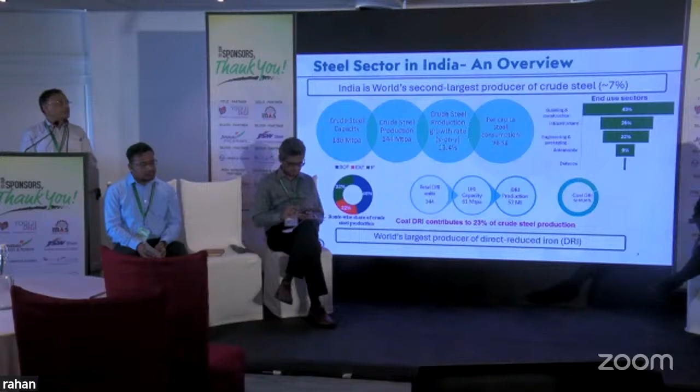Now, coming specifically on the steel sector, this slide gives... I can't see it very well, so I have to look at the printout. What is the growth rate?

Another important factor for the steel industry is production, about 150 million tons presently. This statistic, 144 million tons, was last year, 23-24, and it has been growing at double digits. The Ministry of Steel is also very proud to say that the steel industry has been growing at double digits, unlike other sectors of the economy, which are growing at 6-7%. Last year's growth rate was almost 13%. So it is very high, the growth rate is extremely high.

One of the reasons for the growth rate is the boom in the construction sector, and this is a hub. West Bengal is a hub of steel, TOR steel. So many big steel companies are here, and they are making mainly for the construction and infrastructure sectors. These are the main growth drivers for steel.

What is also important - all of you are from the steel sector, so I need not mention that India is one of the largest producers of DRI, almost 350 plants. And that also coal-based DRI, which is the biggest bottleneck for decarbonization. That is well understood now. 80% of DRI production in India is coal-based, using the horizontal rotary kiln.

Unlike in the West, Europe, USA, everybody is on natural gas-based DRI. Mostly all are natural gas. Coal-based DRI is only used probably in India or South Africa or some other countries - very few countries in the world use this kind of technology. Hence it is a big challenge for decarbonization.

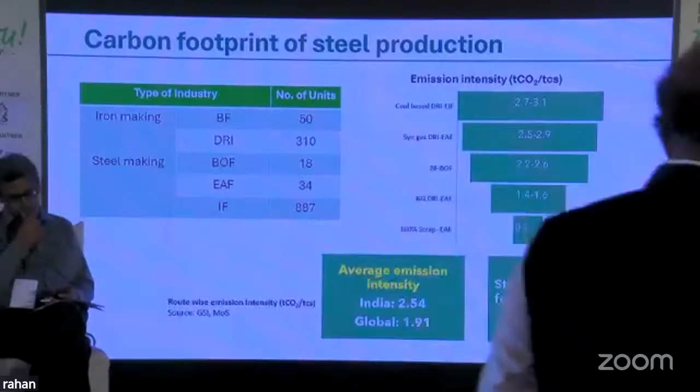As I showed you in one of my previous slides also, the per capita consumption of steel in India is still very low, 98 kgs, whereas in developed countries it is 300 to 400 kgs per person per annum. So the growth drivers are in India, and everybody is wanting to focus on India. Now I don't know how much it is translating into the ground, but that is a challenge, and I'll talk about some of the challenges later on.

These are the various decarbonization initiatives taken by the large corporate sector. It is heartening to know that most of them, I'm not going into detail here for lack of time, but everybody, the large steel players like JSW, Tata Steel, Jindal Steel Power, everybody is talking about decarbonization. All are focusing on it because they see a future for that, and they have announced a more ambitious target than the country's emission target of 2070. It is very heartening to note that, obviously keeping in mind that if you have to be a player in the international market, you have to do that. Otherwise, there will be some kind of carrot or stick approach which will come. It is already under planning, but it can come anytime. After 2030, I would think we have got a good lead time of 5 years before anything like carbon tax and things like that are introduced.

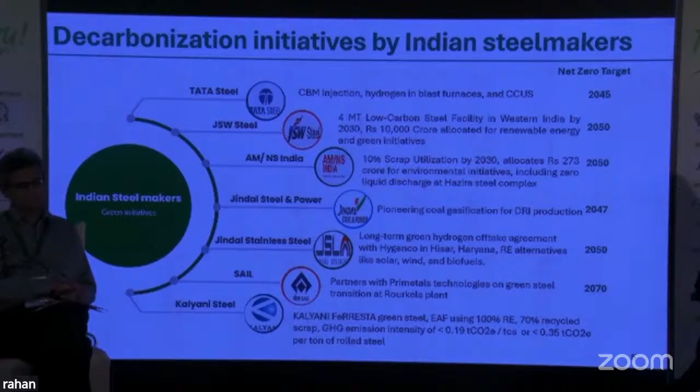Here also one of the slides tells about Kalyani Steel. I'm sure all of you are aware of this Kalyani FeRRESTA initiative, where they have used scrap, melting scrap in an arc furnace using renewable energy, and they have achieved very low emission, that is green steel, of intensity 0.2 tons of CO2 per ton of crude steel. So this is an initiative which Kalyani Steel has already done.

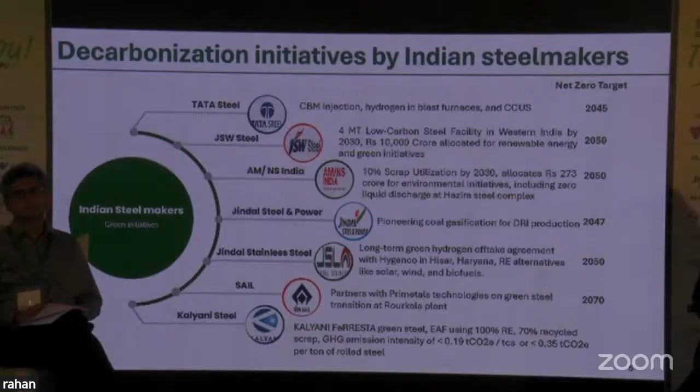Now, net zero roadmap. I will drop this, won't go into details. I don't know how much time I have already taken. Sambit, how much time is left? You have 5 minutes.

No problem, okay. Because this is the India initiative, government initiatives, and all of you are aware of this kind of national steel policy, vehicle scrappage policy, national green hydrogen mission, and so on and so forth. These are national level policies. Government has taken a lot of proactive measures, PLI scheme for steel, for example, for specialty steel. So things are moving, government has been thinking on that. In a way, it is quite positive. And we have also partnered with the Ministry.

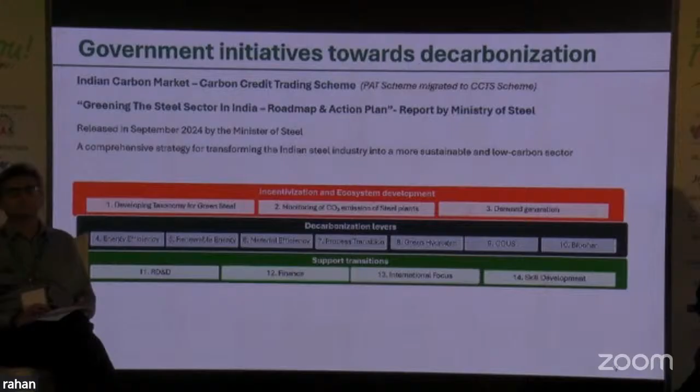TERI is a partner with Ministry of Steel in this initiative of greening of the steel sector in India. I'm sure you might have read this report or be aware of it, the roadmap and action plan. This was released by the Ministry of Steel last year in September in a function in Delhi. We have partnered with, and been a knowledge partner to, the Ministry of Steel, and TERI has actually supported 7 of the working groups. There are 14 working groups which were set up, and all the industry people were also involved. For example, right from developing the taxonomy for steel, CO2 emission monitoring of steel and how it can be done, demand creation for green steel, energy efficiency, renewable energy, material efficiency, circularity, and all those kinds of things, CCUS, biochar, R&D initiatives, financing, international focus, skill development and skilling. These were discussed over 2-3 months, or I think it went over 6 months of discussion, across several working groups. Then it was consolidated into a huge report, a voluminous report, maybe 300-400 pages, which has been released. It is downloadable, freely downloadable from the Ministry of Steel website.

Decarbonization of steel, which is our topic, we are running out of time, but let me mention these are analyses done by TERI, not a government analysis. We have analyzed the different ways of decarbonization if we have to reach net zero.

In material efficiency, reducing the material usage of steel in production design or construction, or replacing steel with alternative material, that can contribute about 10% savings of CO2. Electrification, new technologies under development like electrowinning, HIsarna and others, these electric technologies can reduce about 9-10%, and it is possible to do that.

So the biggest lever for decarbonization of steel, just to recall, is green hydrogen at number one, CCUS at number two, and then circularity or scrap usage. This can actually reduce almost 60% of emissions from the steel industry. These are the big levers.

Of course, there are challenges. It is easier said than done with hydrogen, because the technology is still under development. Green hydrogen DRI making is still under development - it is already developed but not fully commercialized, I would rather say. It is developed and demonstrated in Europe.

I can see I'm running out of time, but if we look at the roadmap, we have drawn a graph about the different levers, and the bottommost graph in blue is actually decarbonized. We are trying to reach net zero by 2070, and how the different levers - these 5 or 6 levers I talked of - stack up and contribute up to 2070. This is forecasting that steel production will rise 4 to 7 fold by 2070 at a steady rate, taken from population growth rate figures.

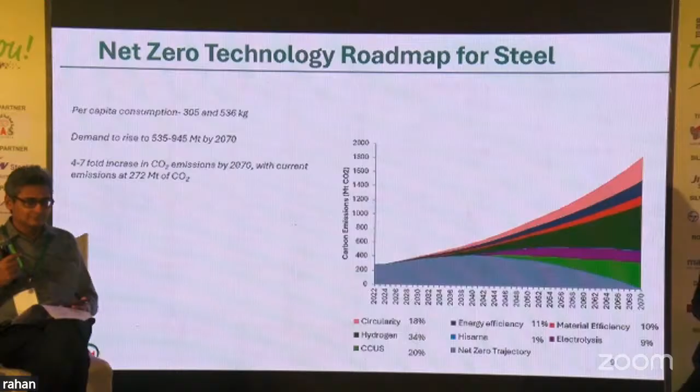So this is a modeling we have created - this is TERI's own model, not taken from other sources. We have developed this model ourselves, and our detailed figures are available with us, showing what can be done for each lever.

Of course, policy is a big challenge. For example, lack of common infrastructure for CCUS, common pipelines for hydrogen, and things like taxonomy for steel. So government support for CCUS and green hydrogen is a key lever in the policy space. If we look at financing, again the most important lever is cost of finance.

I'm sure all of you agree, unless it is economic to produce green steel, it can't be mobilized. So low cost capital, subsidy, low interest rates - things like that for de-risking investment in green steel. Anybody producing green steel at this point, the government needs to think of de-risking the investment, perhaps through a risk guarantee fund, and business models to promote use of scrap and circularity in the Indian system.

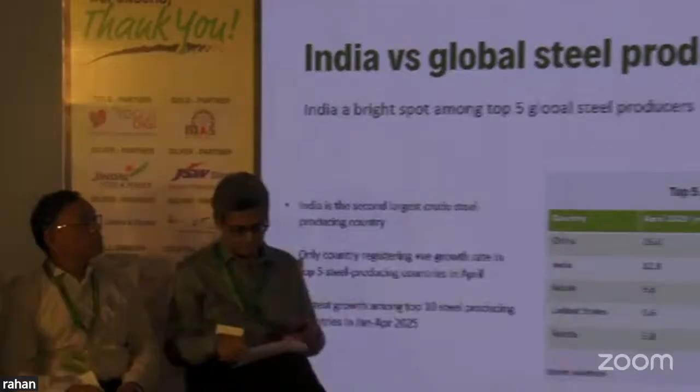I wanted to start off with a little bit of context setting, essentially to show the importance of India, not just for us here discussing the steel sector, but also on a global perspective. The reason being that it's the second largest crude steel producing country in the world. It's also the only country registering a positive growth rate among the top 5 steel producing countries.

What's been driving this change is very strong macro indicators and government initiatives. There's a huge push on infrastructure projects. There's a lot of demand from end-user sectors as well, like infrastructure, construction, manufacturing, automotive. So on a ground level, the fundamentals are pretty strong, even though currently there are some headwinds which I'll get into later. There have been some changes in fiscal year 25 and now 26 as well, mainly the domestic market being impacted by imports. However, with the onset of the safeguard duty, there's been lower imports so far, but currently there are still some challenges that India is trying to overcome at the moment.

Here I have included the current HRC, CRC plates, hot dip galvanized, and also pre-painted coated galvanized prices. As you can see, prices have been trending higher between January and April. The reason being there was a lot of rumors circulating about the safeguard duty, which caused prices to spike. And finally, with the imposition of the safeguard duty, that helped keep prices higher. However, since May of this year, there's been a bearish trend in HRC and other flat product prices because of seasonality.

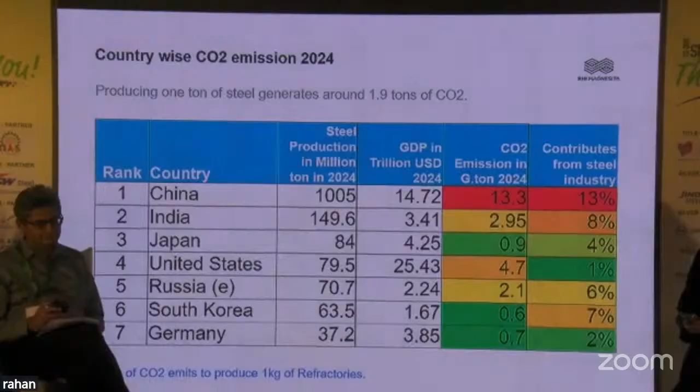I'll quickly go over the correlation between CO2 and economic growth. Today, India is the fifth largest economy in the world, but there is a correlation. In terms of CO2 emission, India is the third largest contributor of CO2 emission. You can see here, it's after China and US. But the major difference is that the US economy, being the largest economy in the world, is based on the service industry.

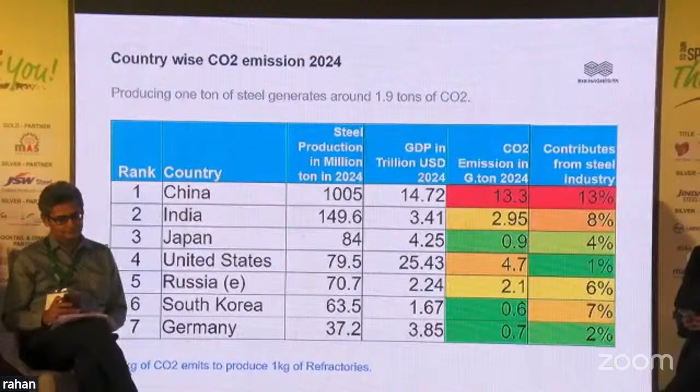If there are three components of the economy - agriculture, industry, and services - more or less 85% revenue comes from services for the US. But it's just the opposite in case of China. China is a manufacturing based economy, and followed by India, another largest manufacturing based industry in the world. Naturally, when any economy is based on manufacturing, there are obvious reasons to emit more CO2 in the atmosphere.

I've also put some data on steel production. As somebody mentioned in the morning, the steel industry produces 40% of the CO2 emissions among all put together. So here I've contributed the country's contribution vis-a-vis steel industry's contributions. You can see in the graph that there's a 13% contribution from the steel industry in China. US is the lowest - it means, as I mentioned, their economy is service based, not manufacturing based. Even in manufacturing, they are not strong enough in steel. They are into oil and gas, chemicals, and other industries that emit much lesser CO2 than the steel industry.

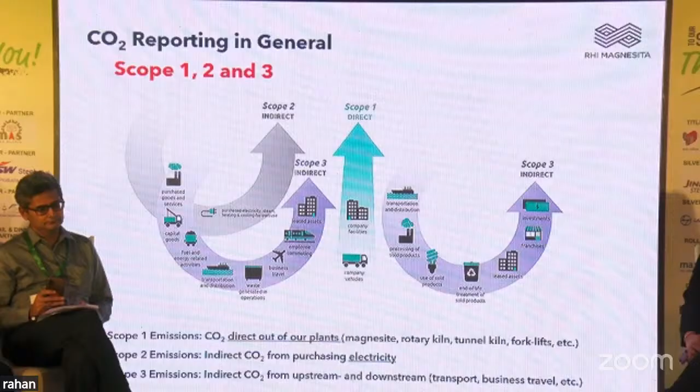Then after use, we dismantle that refractory. After dismantling, we again collect it in a particular way so that we can reuse that material in the process again, of course with proper treatment. That is all about the circular economy in the refractory industries.

In short, as I mentioned, about 2 kg of CO2 emits to produce 1 kg of refractory. Normally it's a direct correlation - if you use more and more recycled material in the recipe, your carbon emissions will get reduced almost in direct proportion. So for 2025, globally we have a target of 15% recycled material to be used in production. Last year we achieved 14.5%, so this is very pragmatic and very easy to achieve this target. You can say the reduction will also be 15% CO2 reduction taking place.

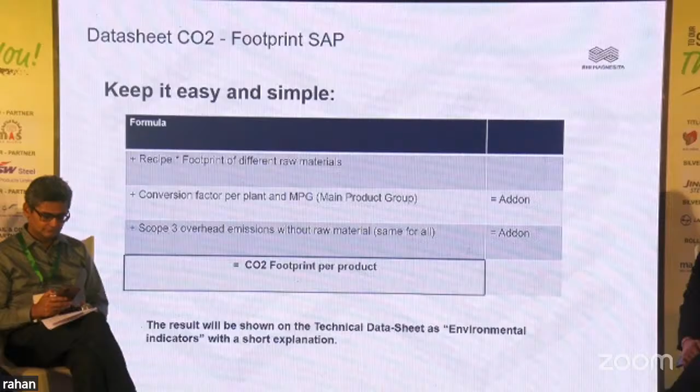From RHI Magnesita, we mention CO2 emissions, or carbon footprint, for each and every product we produce. For green steel producers who are concerned about CO2 emissions, we have various solutions. For a single product, we have 2-3 categories that give different levels of carbon footprint for the same product, because today, particularly in Europe and US, they have also started mentioning CO2 emissions in their products. So from RHI Magnesita, we took that initiative and already implemented it in 2023. Every product we produce, we mention its CO2 emission.

So, just an example, ANKERHARTH, that is the bottom hearth of the electric arc furnace. That's one of the strong brands of RHI since the last 50-60 years, the ANKERHARTH brand. We mention that 1.7 kg of CO2 emits to produce 1 kg of ANKERHARTH material. So a steel maker, if he has some calculation or a target to achieve a certain CO2 emission target, he can control or select the product based on the carbon footprint.

CO2 emissions take place differently for different product lines. For example, for alumina systems, the CO2 emissions are much lesser because the impurity is much lesser in the alumina-based or alumina-silica based product. In the refractory industry, primarily there are 3 products: the basic, that is magnesite and dolomite; the non-basic, called alumina, that is the bauxite based material; and the acidic, very rarely used, only in a few cases for the coke oven battery, that is silica refractory. That does not emit too much CO2.

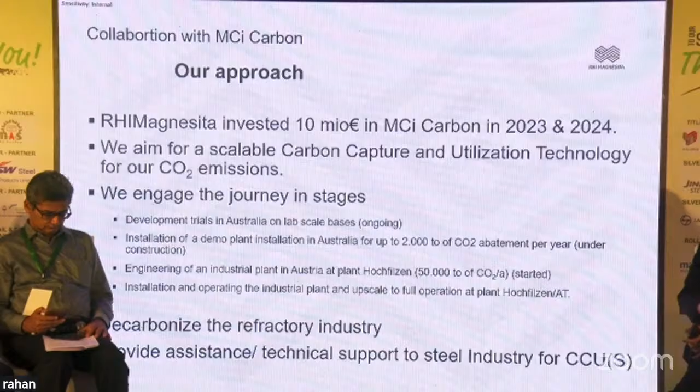For alumina systems, Gujarat is the region where we maximum collect and process bauxite, which is also used in alumina systems of refractory, but we also import high volume of bauxite from China. So it is not a major concern for India at the moment, except using more and more recycle in the process.

Globally, what we do today is the conventional way. For India, at the moment it's directly proportional - if you put more amount of recycle in a controllable way in the recipe, you can save more CO2 and reduce lesser CO2 emission to the atmosphere.

Second, if we switch from basic systems to neutral systems like alumina silicate, that also reduces carbon emissions. Today JSW and Tata Steel - if you're from the steel processing background, you know there were recent changes in the last 2 years where magnesia carbon used to apply in the slag zones is now getting replaced by spinel bricks. Spinel is just alumina spinel, only 4-5% MgO in the system, because of the carbon pickup and other issues, and that gives much 20% better life than magnesia carbon. So that change has already taken place, which is an ongoing process.

Second, electrification - if you switch from oil or gas producer to electrification, CO2 emissions can be reduced. The last point is CCUS, carbon capture, utilization and storage, which isn't really being done yet from the refractory side in India, but globally RHI Magnesita started doing some activity on CCU, and we did a partnership with the Australian startup called MCi Carbon.

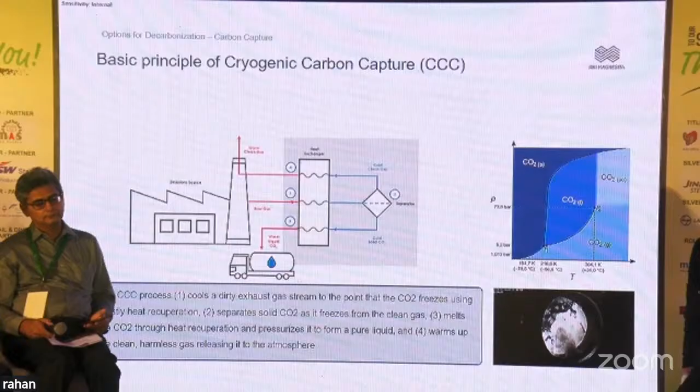Now the CO2 you collect in solid form, you process through a heat exchanger to convert it into liquid, and once it's liquid you can store it somewhere and use it in different applications like mineralization and food processing industry. I'm not going into details, I'm skipping this slide - I already mentioned the same thing.

Now, what about H2 at RHI Magnesita?

Honestly, at the moment we are not doing anything for H2. We are just focusing on CCU, carbon capture and utilization. Why not focus on H2? Because as of now, we do not even know how refractory will behave under a hydrogen atmosphere. If you use hydrogen as an alternate fuel for calcination or sintering, how the refractory behavior will change is still not known to us. Research is going on regarding how refractory will behave under hydrogen atmosphere, through burners or in the whole environment during application and processing, but it's not yet tested.

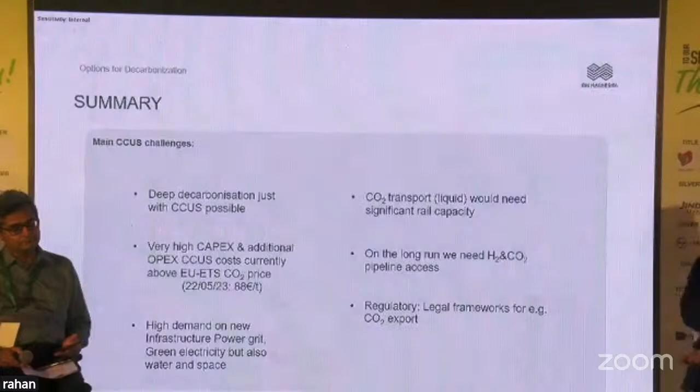But for CO2, we already invested 10 million euros with MCi Carbon, an Australian company, to set up a pilot plant for how to capture and utilize CO2. I'm not going into the challenges, but as you mentioned, in India there will be separate pipelines for CO2 and hydrogen gas. There will be massive capex investment, and storage or transportation of H2 and CO2 gas. So whatever the steel industry plans for 30 years after 2050, we are aligned, but from our side in India, we are not focusing on that much yet.

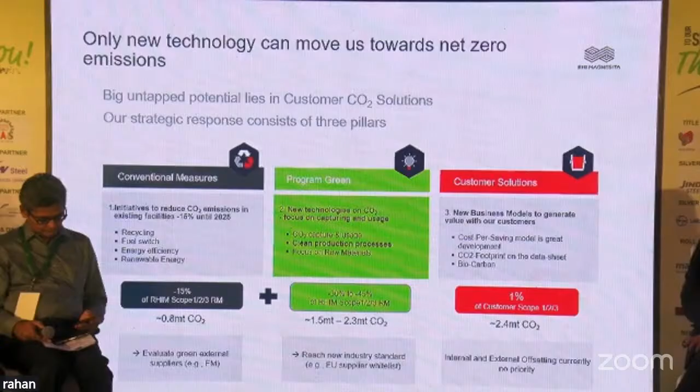There is no control because they give this job to a third party, and for economical reasons that third party goes to the open market. While collecting spent refractory this way, there is a high chance of mixing all those grades, because that is the takeaway. If, during dismantling, you keep the basic part separate and the alumina part separate, there is less chance of contamination — that we need to avoid.

That is why the steel industry has to make a partnership with the refractory producer, because they are concerned about quality. This is not something new for India — India has used recycled material for the last 30, 40 years, but that was for economic reasons, not ecological reasons. Today we started thinking about ecological reasons, because more recycled material gives less CO2 emission to the atmosphere, without compromising quality. That is why these two stakeholders have to align with each other, so there should not be any third party where chances of quality compromise mess things up.

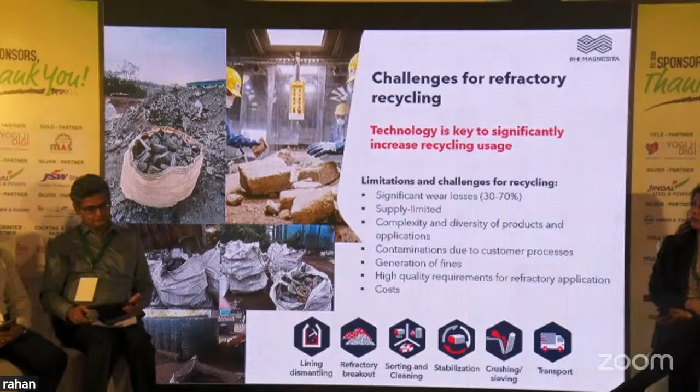So this is the situation. Thank you very much for your questions.

Thank you, Mr. Shatra. This is indeed a very in-depth analysis of sustainable refractory production. You talked about our limitation because raw materials are mostly imported from China, and how we have to change the type of refractory used from basic to neutral or acidic, like alumina and alumina silica. You also talked about how you changed from coal to oil and natural gas. But in the eastern sector of our country, natural gas availability is a question, and this needs to be carried out in tandem with the steel sector, ferroalloy industries, and refractory industries, because without their support and application, the steel industry cannot sustain itself. So this is a very important part of and challenge for our future.

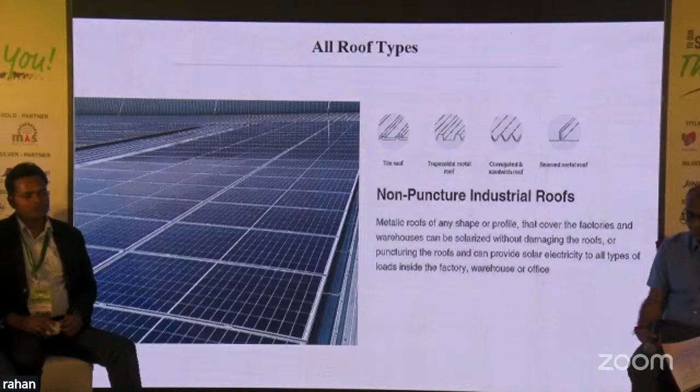So you can see the roof types that we cater to are trapezoidal, standing seam, and any other profile of roof, even the RCC roofs and the parking sheds. This non-puncture type installation helps you achieve uniform load distribution without any puncturing and without any long-term damage to the roof, so that your roof sheet life is also preserved along with the 25 years of performance and product warranty that we give with our solar hardware.

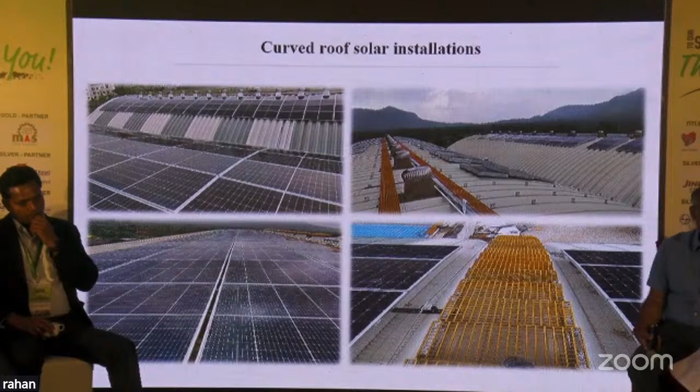Here are some other snapshots of our installation, like the one you see at D Decor Home Textiles near Mumbai, wherein the vertical wall mounted option was chosen because of scarcity in roof space. It's a total 3.7 megawatt industrial installation with 700 kilowatt on the vertical wall. And even on curved roofs, this is our installation at Varsha Foods in Andhra, who is a mango pulp maker. This is a curved roof installation that we have done.

And this video, you can just click on it. No, just click on this. Click on the slide.

This demonstrates the mechanical strength of the non-puncture type mounting frame on which the solar panel sits. As I said, this has a wind load stability of up to 200 kilometers per hour without any puncturing, riveting, or drilling.

So that you understand the care and the responsibility we take not to harm your factory building roof while you execute the rooftop solar project.

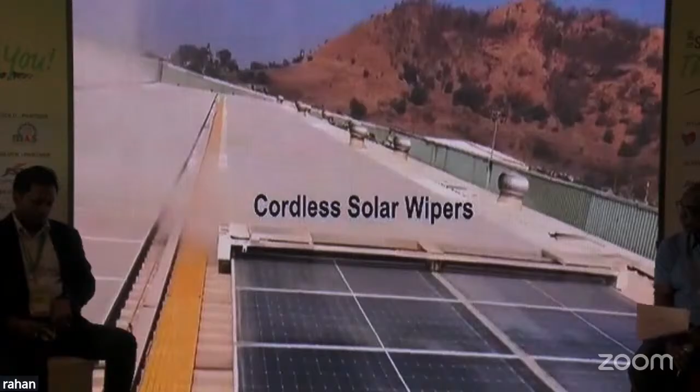So this is the rooftop solar installation. Could you play video number 3, please? This is another video where you will see the ground-mounted solar plant we have done in Madhya Pradesh, which is over a 2 megawatt plant. The robotic wiper is again doing the cleaning round to eliminate dust settling on the solar plant, which is a major recurring cost and pain area, a labor-intensive recurring cost to keep solar plants clean. This automation is manufactured in-house at our Indore factory, the cordless robotic wiper.

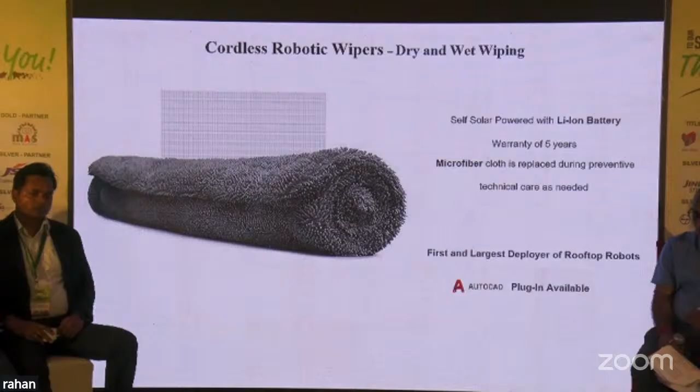Coming to the other aspects, the key differentiators we have over and above the other solar players: the 25 years of warranty on the complete hardware helps eliminate any recurring CapEx cost for replacement of inverters or accessories. The robotic cleaners help eliminate the recurring cost of labor. The 10 years of technical AMC, which we present along with our CapEx offer. And of course, the puncture-free technology with load on your roof less than 13 kg per square meter to take care of the health of your factory building in the long run.

So I will end my presentation with a video of our completely integrated solar technology. You can play video number 4, which highlights the solar technology.

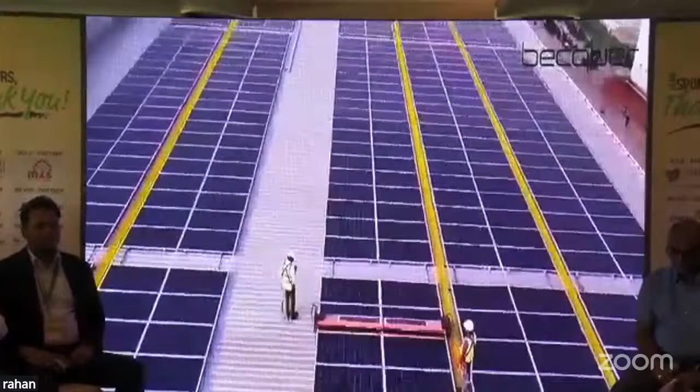This is one of our installations, and you can see the robotic cleaners integrated with the rooftop installations here, which move across your roof, cleaning the solar plant without you spending a penny on manual cleaning on a day-to-day basis.

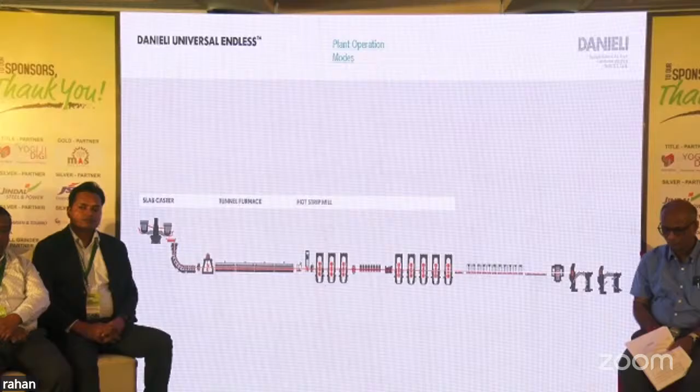This is a typical layout of Danieli QSP DUE - we call it DUE Danieli Universal Endless. As you can see here, we're talking of the caster till the down coiler: the slab caster followed by the tunnel furnace. In front of the tunnel furnace is a pendulum shear, the hot strip mills, the laminar cooling, and the down coiler. What makes us different is that our mills are split, the rougher and the finisher. What is the advantage of it? I'll try to speak about that in the next slides.

As you can also see here, we mentioned CTC, that is coil to coil, which is like a batch mode, one slab into one coil. In between there's a semi-endless, and then the endless. Endless is a concept known to most people here - in endless mode, there's no particular division of a slab, it's cast continuously and the coils are made. But how is the difference between having 3 modes? Imagine a car - you have eco mode, a powerful mode, or a cruise mode. Based on the road you drive, you can change the mode to get the best suitable output of your car. It's similar - coil to coil has certain advantages, as do the semi-endless and endless modes.

Let me give you a point about semi-endless - when do you prefer it? For instance, you'd like to roll silicon steel or ultra low carbon steel, which has the limitation of slow casting speed, but at the same time needs a higher finishing mill exit temperature - contradicting requirements. So you have a slow casting speed from the caster, but need a higher temperature at the FM exit. That's where induction heaters in between help you, and so semi-endless gives you a better feature. Now I'll explain to you what CTC, semi-endless, and endless are.

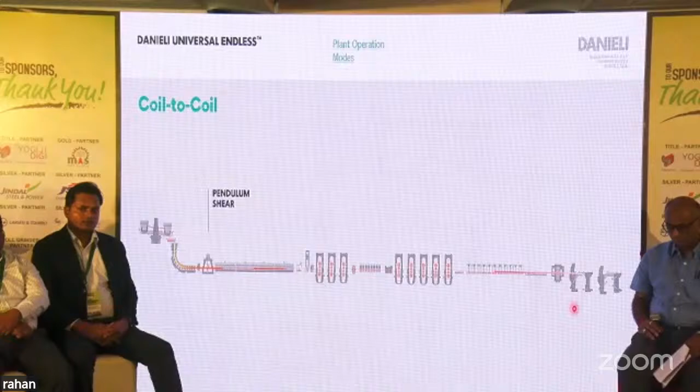So this is a coil to coil in which you can see that something is traveling here, and then one slab becomes one coil. The partition is done by the pendulum shear. This is something very typical of what we have seen in thin slab casting and rolling in some of the plants in India.

Now comes the difference, the second one, the semi-endless. In case of semi-endless, one slab is equal to the complete length of the tunnel furnace. Now the partition takes place, and this longer slab can be further made into baby coils of say 5 or 6. The division takes place at a high speed shear.

The semi-endless has the benefits of both coil to coil and endless. As I mentioned, in case you want to roll silicon steel NGO, the semi-endless will give you all the best features of it. Now this is the endless mode.

There are technologies available in the market which are purely coil to coil or purely endless, while what we are offering is a plant which can work on all three modes, and you can choose between coil to coil, semi-endless and endless. Endless is very important when you go for ultra thin gauges, talking 0.8 mm or 1 mm of low carbon, with tight geometrical tolerances. While you're talking of silicon steel or ultra low carbon exposed grades, you switch to semi-endless. And when you're talking of API, you go to CTC, coil to coil mode.

Now, what is the challenge of endless mode? The challenge is that it is less energy efficient, and it takes a lot of energy in terms of induction heaters, because of the slow casting speed driven by the caster. So you need to maintain some temperature, and it is energy intensive. But at the same time, you're able to do it because you get a premium from your customer, say when selling 0.8 mm hot roll coil with flatness and thickness tolerances of around 16 micron, for instance.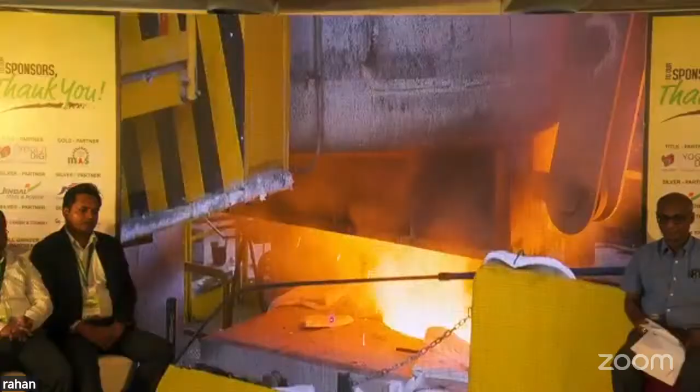Here you can see, okay, so...

I wanted to pause at a particular moment which is of interest, though it's not related to our technology, but still it would be of interest since we are talking of green steel. You can see this hood, which is over the ladle. This hood is something we have seen in every steel plant in China. Though this is not our technology, it's coming from someone who specializes in suction hoods, and they put it over the casting platform, the ladles. This is the casting platform, and you can see this hood nicely built, and it absorbs all the fumes. This is relevant to a particular topic of today, something that can also be thought of for steel plants, whether it's a direct casting rolling plant or a conventional slab caster.

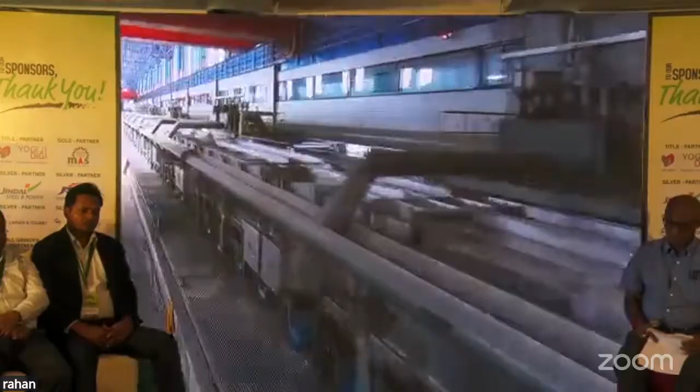So these are the visuals of our plant in Yukon. And the beauty of Yukon is this is a 4.6 million tons per annum plant. Typically, thin slab casters are around 2.5 or 3 million tons per annum, but this one is 4.6 million tons per annum, and it is the world's highest throughput plant working on 2 slab casters.

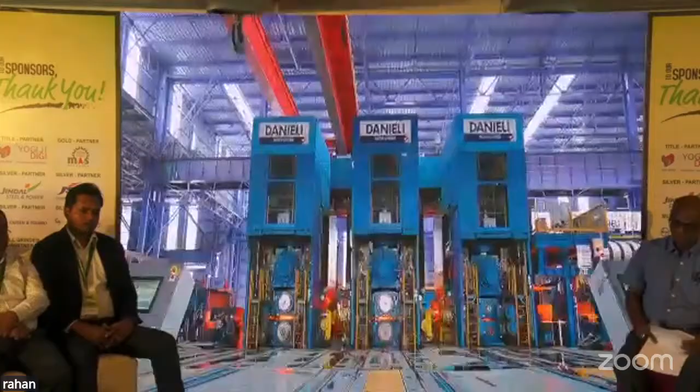Initially, the customer wanted to put up a hot strip mill, but when we tried to convince him, we showed the benefits that he can have a range of 0.8 to 25.4 mm with no limitation in any of the grades. That's the beauty which has led to this 4.6 million tons per annum plant. Now, I stress this point again, 4.6 million tons per annum.

Now, how does this affect the decarbonization topic we are talking about, which I'll explain in the next slides. This is again what I said: it's a 4.6 million tons per annum hot rolled coil plant. So as Danieli, we say that if decarbonization or green steel is the vision for you, then direct rolling is the only one which can give you competitive and green hot rolled coils.

Here I mention any grade, including IF, interstitial free, exposed grades. This was until now done conventionally through slab casters because it needs scarfing—interstitial free and auto exposed grades require the slabs to be cleaned on the surface after casting. But in the case of QSP DUE, we have a provision of getting these slabs scarfed before they enter the rolling mill, making it possible to produce interstitial free steel as well.

Electrical steel, API up to X80—how is this possible? Our rougher and finishing stands are separate, so in between we have a transfer bar cooling system that brings the temperature below recrystallization, promoting thermomechanical rolling. For electrical steel, there are induction heaters before the finishing mill, so you can go with higher input temperature to reach around 920 degrees centigrade at the exit of the FM, which is required. So practically, you can produce all the grades from one single mill.

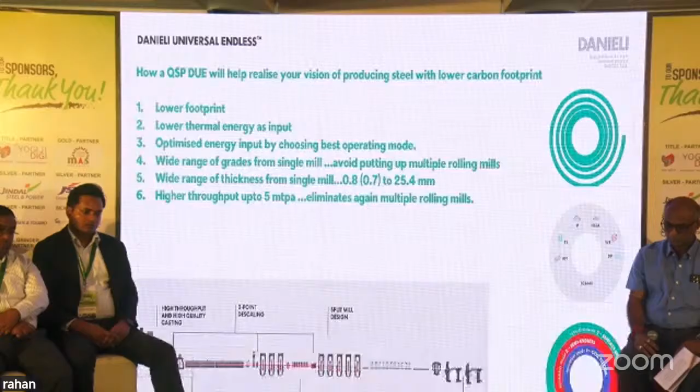Now the green concept—this is of importance for today, and I'd like to spend a few moments on it. Summarizing our technology, the various features in different modes, the flexibility of rolling any grade, and producing thicknesses from 0.7 mm to 25.4 mm—how is this going to help you in decarbonization? The QSP DUE will help realize your vision of producing steel with a lower carbon footprint.

Now, how do we get a lower footprint? This is a typical layout—from the caster till the down coiler, it's around 380 meters. A typical conventional semi-continuous hot strip mill will require around 400 meters. So this is where one advantage comes in: the layout is very small, so the carbon footprint is less. Then there's lower thermal energy input—as I mentioned, the tunnel furnace input temperature of the slabs is already around 900 to 1000 degrees.

And then the exit temperature has to be maintained at 1150 to 1180, so you're talking of only a delta of 200 degrees centigrade. On the contrary, if you talk of conventional hot strip mill, the reheating furnaces will have a delta of say 45 degrees, that is ambient, to 1200 degrees centigrade. So here, in case of a tunnel furnace, which is the benefit of direct slab casting, there is less amount of thermal energy required.

This tunnel furnace can be gas-based. You can have mixed gas, natural gas, and we know that burners suitable for natural gas can also be adapted in future for hydrogen. You can also replace gas-based burners with electrical heaters and induction heaters. This is something we are already providing to SSAB Lulea.

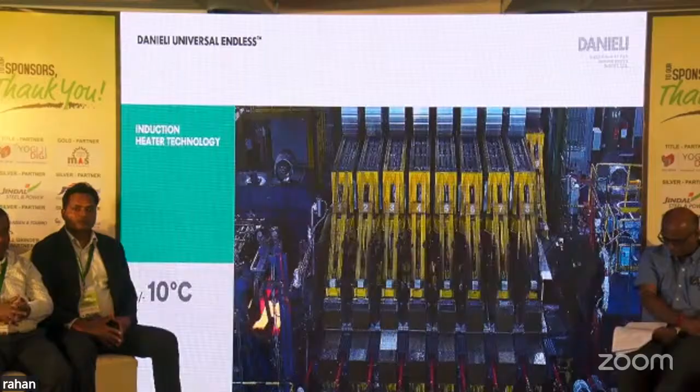Now I would like to stress on this topic, which could be interesting, but in less than 2 minutes for sure: the power of substitution. One of the prime reasons of having a cold rolling mill is to reduce the thickness. The prime objective of the cold rolling mill is to reduce the thickness of the hot rolled coil, say from a range of 1.5 to 5 mm as a hot rolled coil, and then reduce it to 0.1 to 2.5 mm. That is one of the prime reasons why a cold rolling mill is established.

But if I say that I can deliver hot rolled coils of up to 0.7 mm, then 0.7 to 1.5 mm was a range which was untouched by conventional hot strip mills, which could only go up to 2 mm. But now, with 0.7 to 2 mm possible from the hot rolled coil, naturally your reductions on the cold rolling mill can be avoided.

And then there are certain grades. So you can see, I try to blink the cold rolling mill. There are certain grades of steel where the requirement for cold roll was only to have a thinner gauge, but with little less stringent surface requirements, which can be directly replaced by the hot rolled coil.

Some applications already proven in one of our Chinese plants at Shougang are the grades SPHC and SPHT for pipes and tubes, which were directly replaced by hot rolled coils. Some structural parts, galvanized parts, forming parts, and also DP780 - we were able to produce a hot rolled coil with tensile strength of 780, and also the right surface finish and flatness, which could directly go into the automotive structural part.

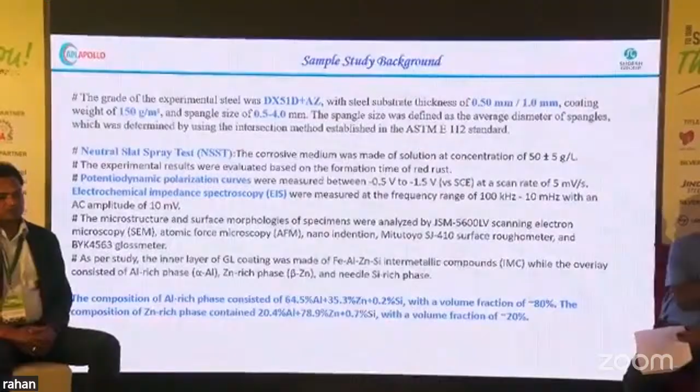Now, the sample under study had a thickness of 0.5 mm to 1 mm, and the coating was AZ150, and the steel grade was DX51D as per EN 10346. Corrosion testing was done with a neutral salt spray test with a salt concentration of 5% at 35 degrees Celsius temperature, and we did validation by different methods like potentiodynamic polarization and electrochemical impedance. Some of this study comes from research papers, and some was done by us.

Now the question arises in this Alu-Zinc: why 55% aluminum? If you go through this curve, you see that as the aluminum content increases, at 55% aluminum it reaches the maximum corrosion resistance capacity. If we further increase the aluminum content, it drastically decreases. That's why 55% is chosen, even though there are no eutectic, eutectoid, peritectic, or peritectoid reactions taking place in the equilibrium diagram of aluminum-zinc.

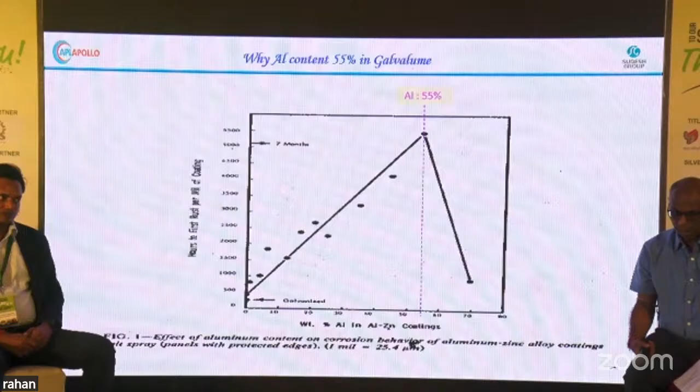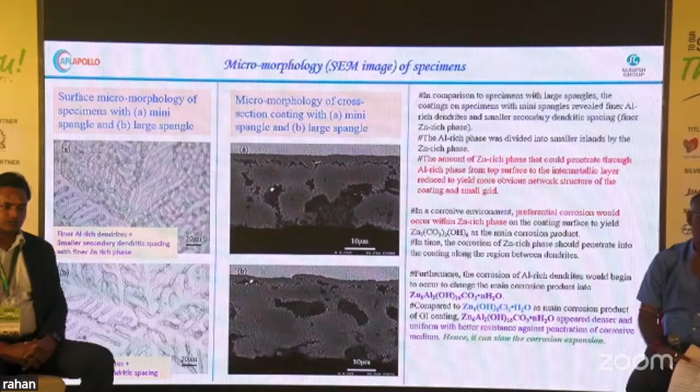As Sir Strader told us, zinc is the only element that sacrifices itself. In this case also, there are basically 2 phases: one is the overlay, and one is inner, which is a combination of iron, aluminum, zinc, and silicon intermetallic compound. This is a very important layer - very thin, but very important. Just like aluminum plays a role in galvanized coating, it plays the same role in Alu-Zinc. The overlay is a combination of two phases: an aluminum-rich phase, which is dendrites, and an interdendritic space, which is mainly a zinc-rich phase.

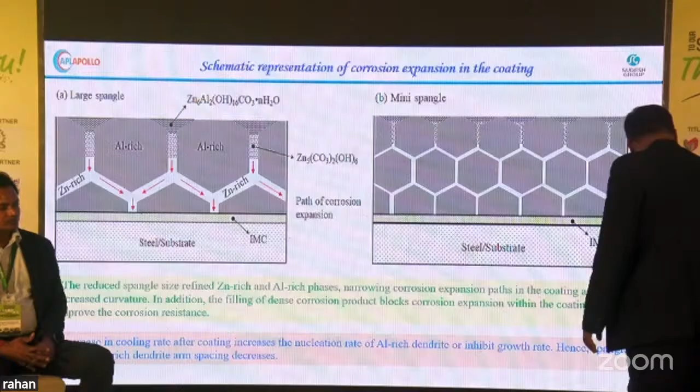By this schematic diagram, on the left side is larger spangles, and the right side is mini spangles. The first corrosion starts on the zinc-rich phase, because it is loose, and then corrosion starts on the aluminum-rich phase, which converts the main compound Zn5(CO3)2(OH)6 into a more denser compound, Zn6Al2(OH)16CO3·nH2O. So it becomes more denser and uniform.

When the spangle size decreases, you can see on the right side that it has to pass through crisscross paths to reach the steel substrate or the intermetallic compounds beforehand. So the path length becomes longer and narrower, creating hindrance to the progress of corrosion products.

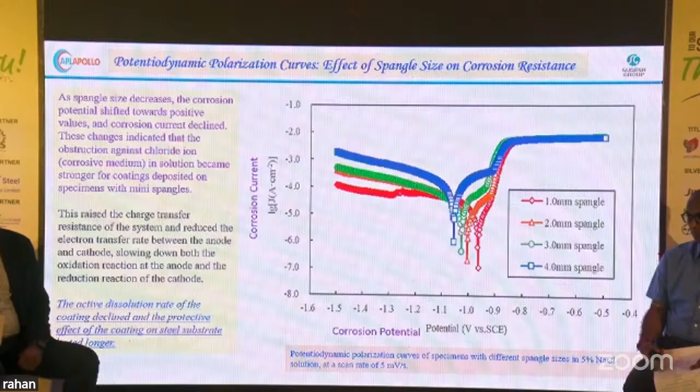Same thing when we go to this potentiodynamic curve - on the vertical axis corrosion current is there, and on the horizontal axis corrosion potential is there. As the spangle size decreases, it is shifting towards the right side. At the same time, the current requirement is also decreasing. So it is also validating that when we are decreasing the spangle size, resistance to corrosion will be more.

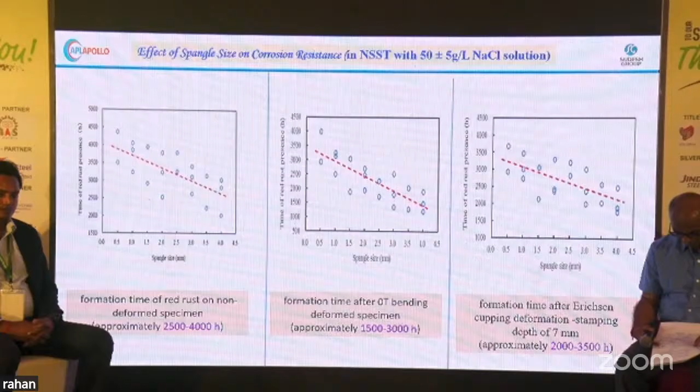Now another practical approach - effect of deformation process. We are using alu-zinc coated products sheet for forming or drawing applications. On the left side is undeformed steel, undeformed coated products. If you see this graph, when the spangle size is less, more corrosion time is required, touching up to 4,000 hours. When we are increasing the spangle size, corrosion rate is fast and the time is lesser, about 2,500. So between 1mm to 4mm spangle size, when we are increasing, corrosion rate is fast.

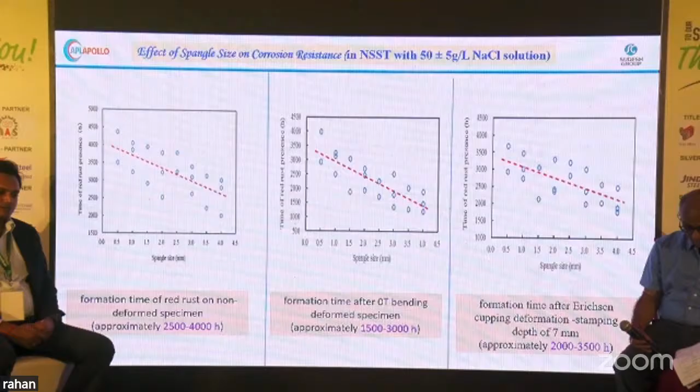And when we are decreasing spangle size, corrosion rate is less, so more corrosion resistant product we are getting. Middle graph is when we are doing forming, bending application for roofing or trapezoidal sheet making for roofing purpose. Here also same thing is happening, though the corrosion rate is more with respect to undeformed steel. But here also lower and smaller spangles give more corrosion resistant product. On the right side is Erichsen cupping test for drawing application. Here also same phenomenon is happening - we are getting up to 3,500 hours when we are decreasing the spangle size.

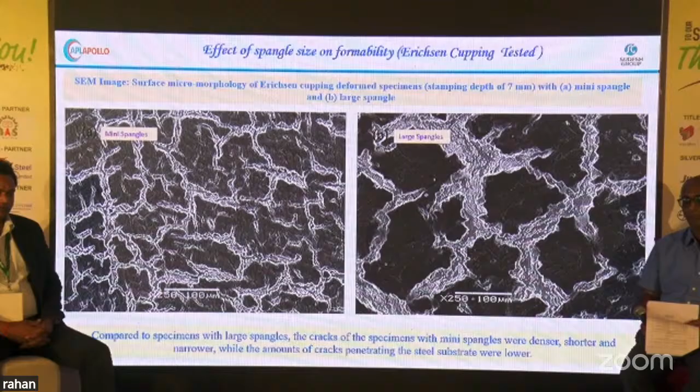Same thing is happening in the cupping test also. Here we can see there are so many hindrances because in the cupping test, three-dimensional deformation is happening lengthwise, widthwise, and at the same time thickness-wise also. So here also, when we are decreasing the spangle size, smaller, zigzag paths are there, so it will not move easily to the substrate.

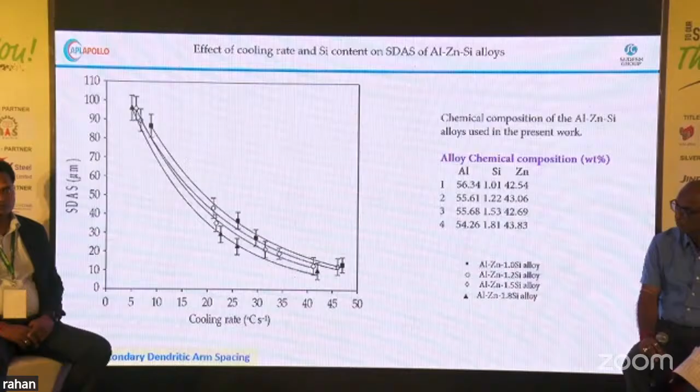It is proving our actual results. We have two independent laboratories, and in both places we got the same results. Even in humidity testing, we are getting more than 2,000 hours before red rust appears. Still it is going on.

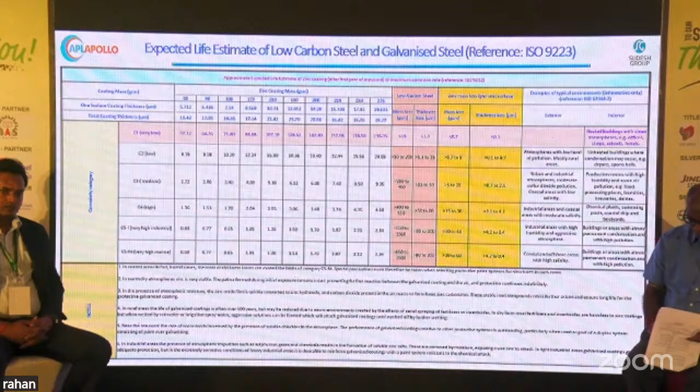On the second column, you can see there are 5 types of corrosive atmosphere, C1 to C5, C5 being the highest corrosive atmosphere. This is the comparison table of the base metal steel versus galvanized. It gives 20 to 25 times more life with respect to normal steels, thus enhancing its life. As I explained earlier, in case of alu zinc, it has 2 to 4 times more corrosion resistance than normal galvanized, so further life enhancement is there.

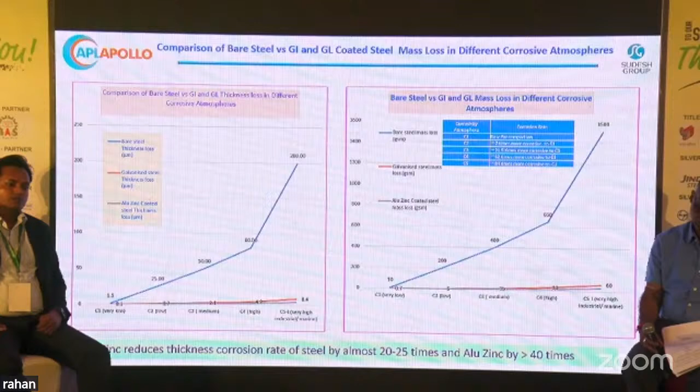Now going through this, the top blue color table compares corrosivity in different atmospheres. The base is C1, which is dry and rural areas, and C5 is highly marine. So 7 times up to 84 times more corrosion rate is there. This blue color graph is for normal steels, then zinc, and below that is alu zinc.

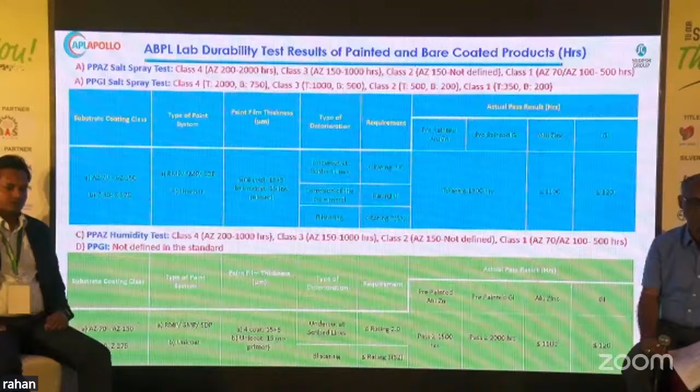Now, whatever paint we are using, irrespective of whether it's RMP, SMP, or SDP, irrespective of paint quality, we have reached rust-free life of more than 1,500 hours. As per our paint supplier, Umesh Vishwakarma, who is our supplier, irrespective of different types of paints, we have achieved this by controlling our spangle size and increasing the life of the alu zinc, over which we do color coating. So that's all from my side.

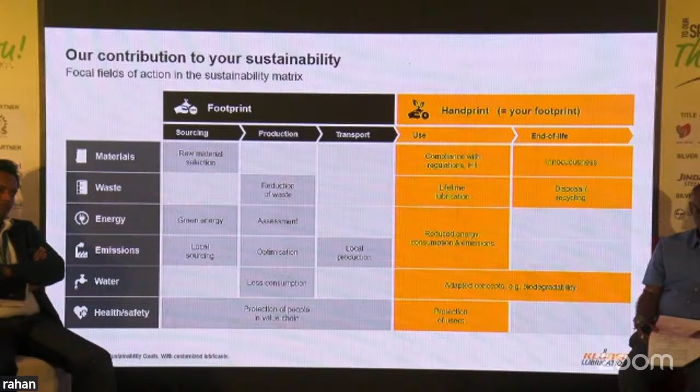Some of the previous speakers were mentioning about being able to present the carbon dioxide footprint for every lubricant that we manufacture. So if you ask us what is the carbon dioxide emitted per kg of lubricant that we are supplying to you, we can be very precise in telling you the number. These are some things we are very proud to give out to all the users, and therefore it's important that all 6 pillars are actually taken care of.

So here I would like to highlight one more thing which we are very proud about. This is the case where I was highlighting about the innovation in the value chain. So we had been asked, or we had been working with a leading steel major in India who had issues in the continuous casting application.

And there we had developed a product which can reduce the clogging issues that they were facing. And with a lot of trials and errors, finally we had been able to come up with a product which is now used in all the casters in India. And it's something we are proud of.

I'll tell you why. Usually, as a German company, we are dependent on our European counterparts to give us technology, and we apply it in India. This is one case where this product was developed in our Mysore plant, tested in an Indian steel maker, and finally this is a product that is now successful and is being used in all the global steel plants. And therefore, this is a matter of pride.

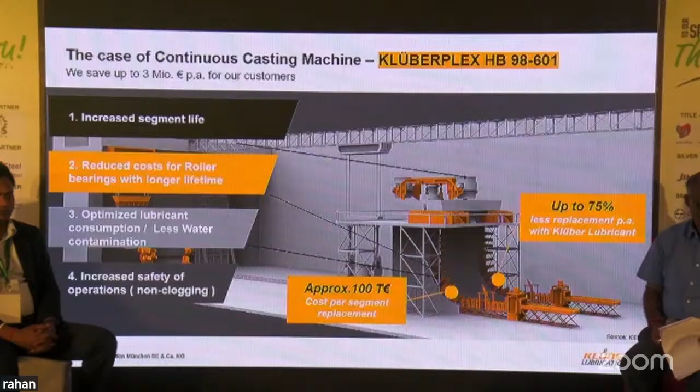I also want to highlight that we do a lot of energy measurements for our lubricants that we supply. Now, energy measurement is not so easy because the way the energy can change depends on so many variables, it's complex. It's not just 5 and 10 variables impacting energy consumption, but almost up to 30 variables that need to be collected and measured to see the difference in the energy you save using lubricants. And here we have a very scientifically followed process, approved and certified, where we have been able to systematically measure and demonstrate the energy savings achievable with shifting to energy efficient lubricants.

Let me move on to the various references we already have by conducting these projects, across the world, across industries. As a lubricant manufacturer, we are where the friction is. Every moving part in the machine moves and also leads to wear and tear. Our job is to reduce friction as much as it can. And therefore, for me, I go to various industry conferences, not just steel, cement, but also across industries. And we get an idea of the various requirements and demands in the market.

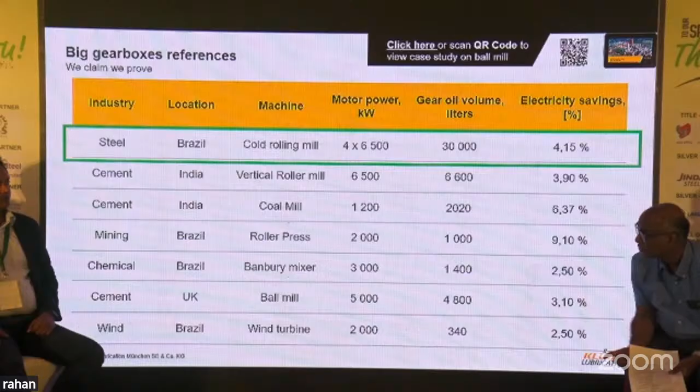The results of this cold rolling mill energy efficiency project are here. I want to highlight that the kilowatt hour per ton reduction is something you could all have a look at. It's implementable with very low effort, but also with quick returns, and I'm talking about returns in less than 1 year.

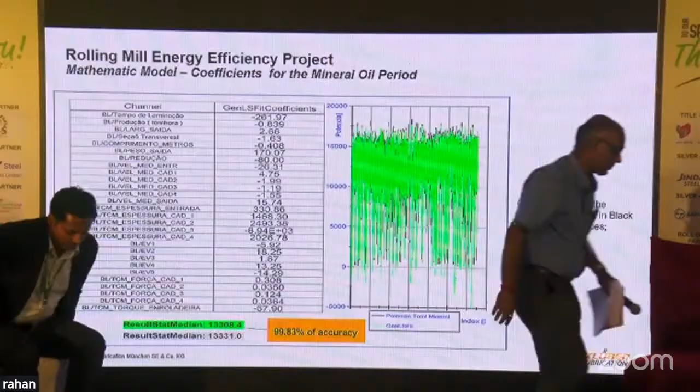In the next 4 or 5 slides, I'll show you the rigor with which we work, calculating and looking at the various parameters that affect energy consumption in a rolling mill, identifying and calculating the energy saved before and after switching to an energy efficient lubricant. Here are glimpses of how we measure the mathematical model when using a mineral oil, and then do an analysis before and after in terms of parameter changes when you do the project.

I want to pause here in case some of you are not generally aware about lubricants, that lubricants work on friction, and the coefficient of friction is very important. When two moving parts are running together, you need a lubricant which can bear the loads, the speeds, and the temperatures.

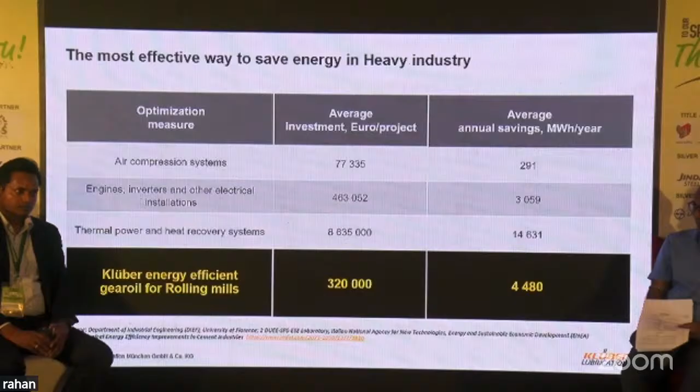There's a study done by the University of Florence in Italy, where they looked at various energy efficiency measures and the relative investments and benefits you get in one year. You can see that when you shift from a conventional oil to an energy efficient oil, the investments and savings are relatively faster, and therefore this is a compelling case for all of us to look at it as an opportunity to save energy and reduce costs.

Also in the same study, we found that the cost effectiveness of shifting from a conventional to an energy efficient oil is the highest in terms of kilowatt hours per euro invested into this kind of initiative. This is a very interesting and significant saving as well.

We don't have enough of these projects, and therefore I encourage all of you to look at energy efficient lubricants as a saving in terms of energy as well as costs.

We don't just invest in the projects, but we also help train how to handle, store, and manage your energy needs within your organization. So we have a lot of specific support from Kluber Lubrication in terms of energy efficiency projects. We've been doing these projects for many years, with almost 500 cases, and we'll be able to help you achieve your sustainability goals.

Just one more slide. We've been working with a lot of end users here, all known to all of us, and the OEMs here - we've been recognized in the industry, both domestically and internationally, for working in the area of energy efficiency and sustainability. This is what we take pride in.

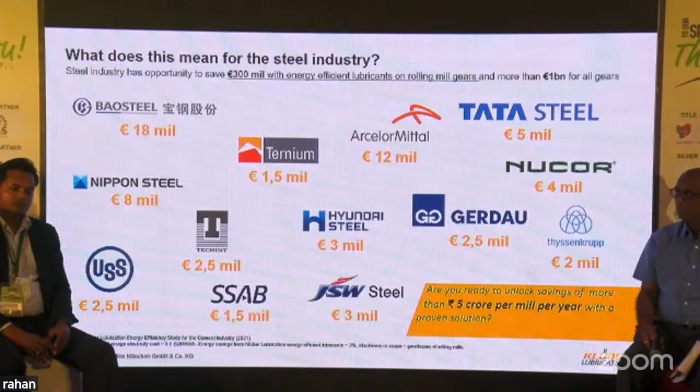So with that said, I would end my presentation and invite all of you to connect with us, work with us, because our goal is to innovate across the value chain. We want to work with you and develop sustainable solutions so that we can build a green ecosystem in the steel industry. Thank you very much.

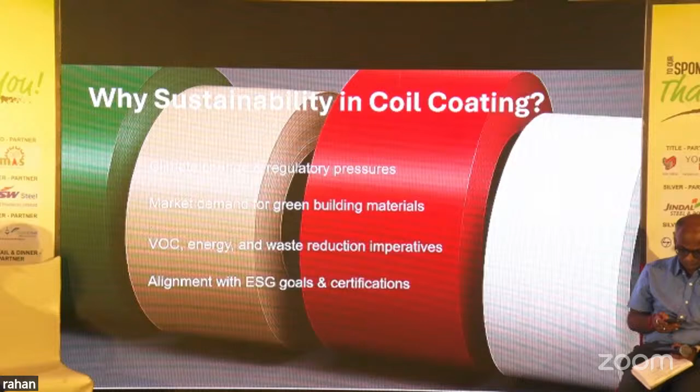These are all the business goals we talk about, and we as a company, as an industry, are doing our bit in this direction. But what is the purpose of doing sustainability? What motivates us? This should be the real purpose of sustainability.

A smile on the face of our kids, on our future generation—this is the purpose that drives us for sustainability. They are the true KPIs, the ultimate return on investment. When we talk about sustainability, we talk about the future generation.

Let's come to the industry I'm talking about, the coil coating industry. It's a very simple process. First, the base metal, made up of galvanized or galvalume, goes into the color coating line, having different processes of pre-treatment, coating of the paint, then drying, and then coiling. Then you get a beautiful coil in different colors and textures.

But what about the carbon map? When we talk about the color coating line, what is the carbon map? The base metal itself emits around 1.8 ton of carbon dioxide footprint in the environment, and our domain, the paint, contributes around 0.1 to 0.15 ton of carbon dioxide emission during production and application on the line. Energy is also required to cure the paint system. So overall, 1 ton of color coated steel emits 2 ton of carbon emission into the atmosphere.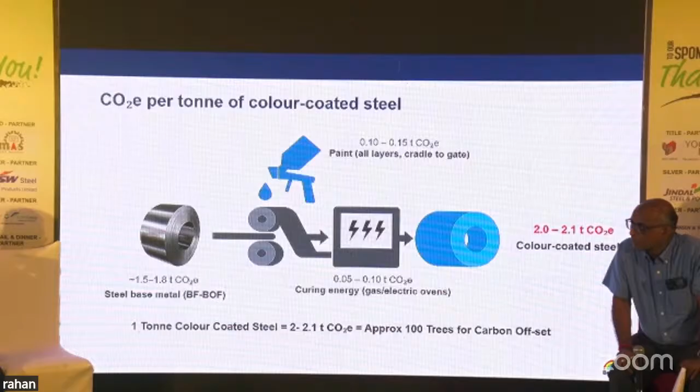So let's simplify the question I asked earlier. 1 ton of color coated steel is emitting 2 ton of carbon emissions—that's approximately 100 trees needed to offset that carbon emission. As you know, 1 tree needs to work throughout the year to absorb around 20 kg of carbon emissions. So the number comes to around 100 trees.

It looks like a very simple and small number, but when we multiply it by the amount of production we are doing right now, you'll be surprised. Right now we are producing around 4 million tons of color-coated steel, which means 400 million trees are required to mitigate the impact the industry is emitting into the atmosphere. So planting 40 crore trees throughout the year is a very huge and complicated task.

So let's have some smart solutions. Let's reduce the carbon footprint through our processes with smart decisions, and let's see sustainability as a promise, not as a cost. There are a few key steps we can take that are readily available in the market—not just at the idea stage. There are steps we can take very easily in collaboration with steel producers, coil coaters, paint suppliers, and end users to implement very easily in India.

We can start with low carbon materials—a very basic thing, using raw materials that emit a lesser carbon footprint into the atmosphere. Then we can enhance our energy efficiency. In the previous presentation, the gentleman talked about lubrication and the impact it can create—so we can enhance our energy efficiency. We can adopt clean technologies like UV and EB coatings. Why do we need the conventional oven for drying the paint? We can also shift to renewable energy for our operations and processes.

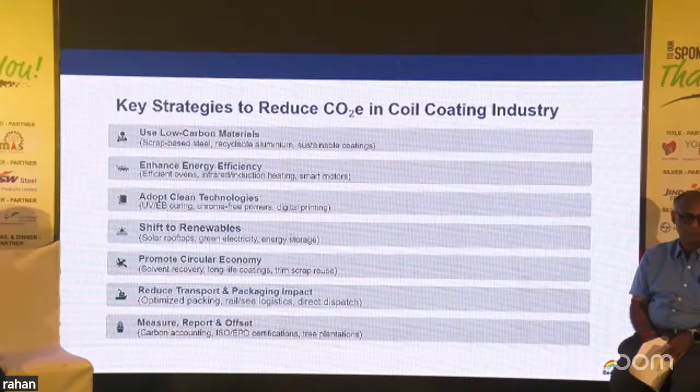Of course, the paint is solvent based, and when it emits into the atmosphere, it gives a lot of carbon footprint. So we can think about a paint system that is high in weight solid, and also made from materials that are not earth derivatives. We can also think about lowering the VOC content, and we should think about adopting chrome-free primers instead of PU primers. We will discuss more about chrome-free primers later, because it's not only about atmospheric impact—it's about health hazards also.

When we think about sustainability, the easiest way is to reduce energy consumption during the process. Conventionally, a paint system for coil coating requires around 230 degrees Celsius to cure the paint, but we can easily reduce the temperature to 190 to 200 degrees Celsius. It saves a lot of energy, almost 25% to 35% lower carbon footprint, without changing anything in the coil coating line.

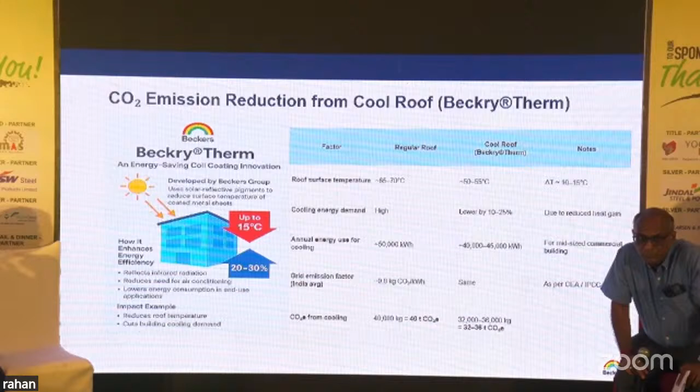This is innovation at its very best, and a prime example of collaboration as well. Beckers Group collaborated with ArcelorMittal in Europe to produce the first EB, electron beam curing, coil coating line, which reduces the carbon footprint very easily by 60%. It is a new innovation, and we can think about this technology in India as well. It cures the paint system in milliseconds. Conventionally, the paint system cures in 25 to 30 seconds in a conventional line, but in milliseconds we can get very good color coated steel. So we can also think about new projects that may come up with having the EB coating oven.

We can also enhance our operations by installing solar roofs, and our Nagpur plant has 400 kilowatt solar power. So we are using renewable energy as well to reduce the carbon footprint during our operations.

We not only use our wastage and the emissions taking place in the atmosphere, we also use material from outside. We have developed a product that is recycled from PET bottles and converted into resin, which we use for making the paint. So we are using the waste of other industries to make paint for the coil coating industry. It's a huge revolution, and we have developed this product, tested it, and now it is fully functional and can be used. That can reduce the carbon footprint in a very drastic way.

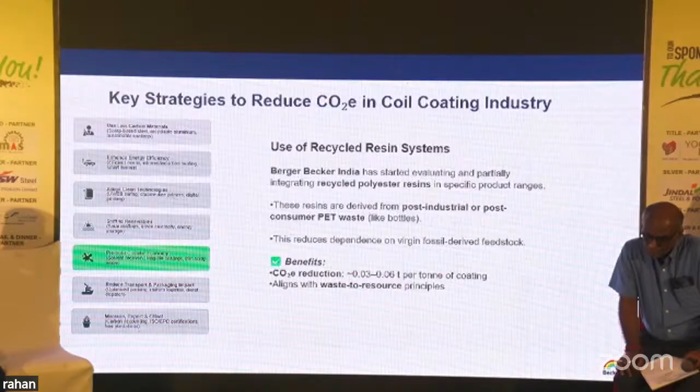We can also think about smart transportation. In a conventional method, we are dispatching materials in 200-liter barrels. We can think about bulk supply, like 20 KL supply, and smart tank storage as well as handling. This will definitely reduce not only the carbon footprint but also the cost involved. So when we think about sustainability, it's not always about the cost, it's about the choice. We can make a smart choice and have good savings as well.

So we do all this innovation, the product development, but how do we measure sustainability? Because unless we quantify the number, we don't know where we are heading. So to make the right decision about the product, we internally developed our sustainability index, called the Beckers Sustainability Index. It's a framework which gives us direction to improve the product. Of course, there are many other certifications and tools available, like LCA and other things, but to take the right decision for product improvement, we need our own sustainability index.

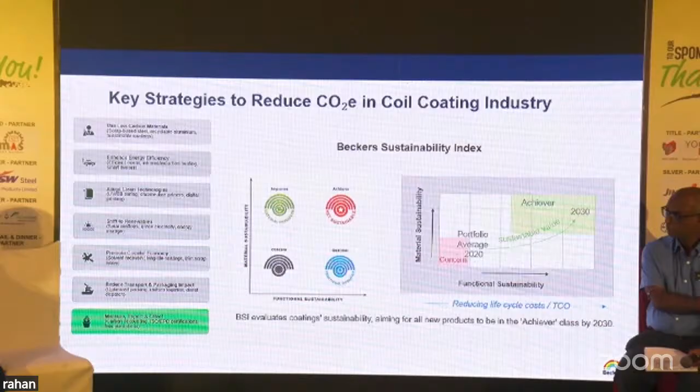If I combine a few small steps, these are only the few I talked about, but there are a number of steps already in place. We can also think about more innovations in product technology. It sums up to around 0.076 carbon footprint saved, which roughly translates into 14 million trees. That is a huge number achieved with very small steps and no investment required.

So I'll discuss the PU chromated primer and chrome-free primer because it's very important. It's not just about the carbon footprint, it's about health as well. It's not about the two products, we are talking about two choices that we make, and the impact is entirely different.

PU primer is the chromated hexavalent chrome primer, which contains chrome-6 hexavalent, and it is not good for health. It also has an impact like cancer and skin diseases later on.

So we should think about not using the PU primer, and we have a readily available solution: the chrome-free primer, because we need to think about our workers as well. It not only reduces the carbon footprint during paint manufacturing, but also has a good impact on health.

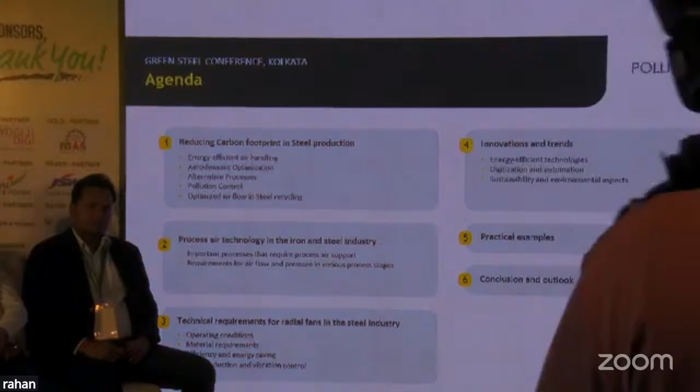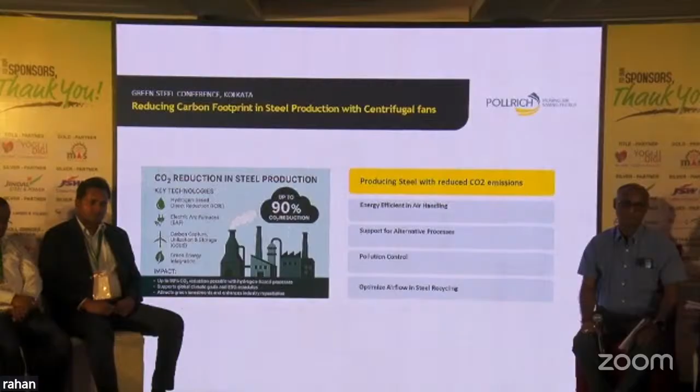So this is a quick overview. Reducing the carbon footprint, as we all talked about, requires a huge amount of reduction. Basically we are talking about energy efficient handling of process and waste gases, support for alternative processes, and how we support pollution control equipment, which also uses fans to push or pull the gases through the processes. So reducing the carbon footprint, first is energy efficiency.

We are proud to present that with the technologies available with us, we are able to design fans with anywhere between 85 to 86% static efficiency, meaning lower power consumption and reduced carbon footprint. We also have aerofoil blade technology, which most of you would have heard of - we've honed that one. We offer aerofoil blades with 86% efficiency, mainly used for clean air applications, because in a dusty environment aerofoil is not recommended as dust gets choked into the gaps.

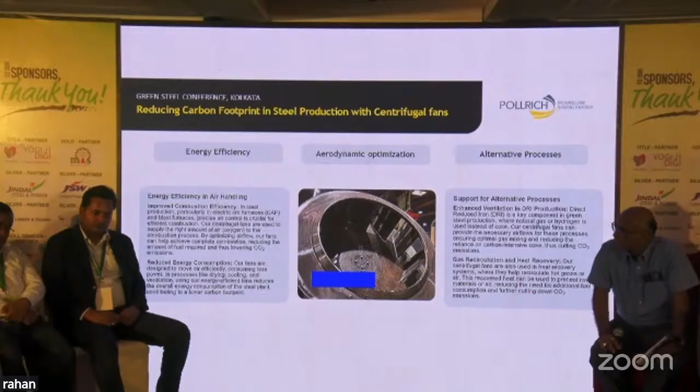For alternative processes, like DRI plants wherever we need to move air, we can offer a high efficiency product. Pollution control is one of the key areas - whether using electrostatic precipitators or bag filters to reduce pollution, these essentially use fans either before or after the equipment.

So we offer our solutions for this. One of the critical things in a fan is optimizing the airflow. How do we do that? We have a specialized inlet guide vane control, which reduces turbulence when the fan is operated.

This saves on power. In process air technologies, fans are used in blast furnaces, direct reduction, de-dusting, and pellet plants. Some examples are pressure blowers, combustion blowers, sinter plants, pellet plant de-dusting, recirculation fans, and de-dusting fans. I'll share some critical things in this presentation.

I will not take you in depth. Basically, what we want to present is that whatever happens in the steel industry, we are very much aware of the processes and how critical it is to design and develop a fan, thereby giving you a very high efficiency fan. We are really masters in this. You can trust us to offer you a very high efficiency, heavy duty fan design. Some of the fan pictures you can see here.

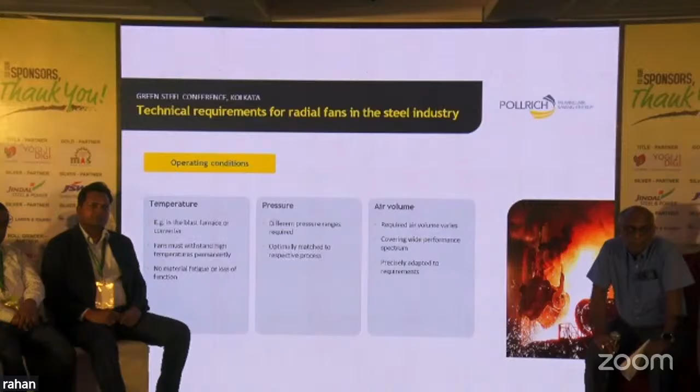Technical requirements: some critical applications require gas tight handling for CO gas, so we design for leak proof operation with machined flanges and mechanical seals, so there is zero leakage. Operating parameters mainly are temperature, pressure, and air volume. These three define the selection of the fan with the best efficiency and the best metallurgy, which can be used for a longer time.

Dust concentration plays a very vital role, because if it's more abrasive dust, like what we experience in sinter dust, it's highly abrasive. So we offer the right solution with wear protection, whether using chromium carbide or tungsten carbide. We have the experience to give you the right product.

On efficiency, we are able to offer anywhere between 85 to 86% efficiency, thereby straight away reducing operating power consumption. We consider all technical parameters collected from customers, do the right selection in terms of aero design and material selection, and offer the right product.

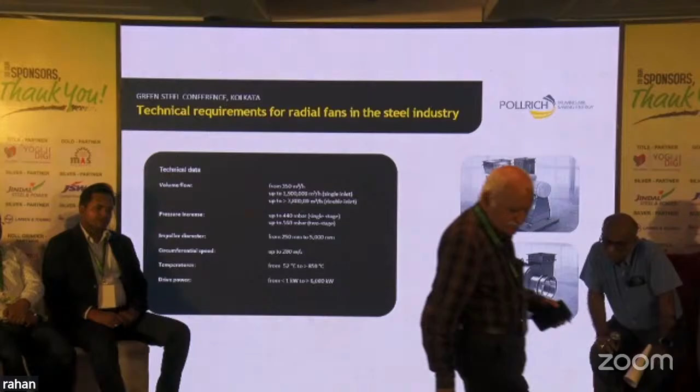In terms of volume, we have a wide range from 350 meter cube per hour as a small fan, up to 19 lakh meter cube per hour in single inlet, and 38 lakh meter cube per hour in double inlet. Pressure ranges up to 440 millibar in single stage to 560 millibar in double stage. In terms of power, we range from 1 kilowatt up to as high as 6,000 kilowatt.

You can trust us that we can offer the steel industry a very high efficiency, heavy duty fan, which will reduce your operating cost and save the environment.

We are in the process of building our manufacturing setup in India. We have started our office in Chennai, with experienced design and service engineers. In case you require any troubleshooting or in-situ balancing, we can offer those services as well.

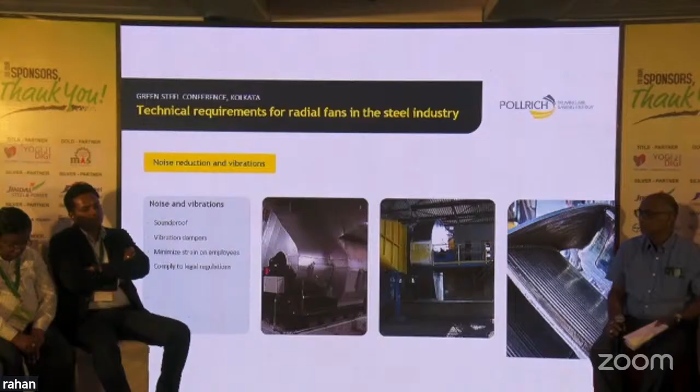We also undertake energy audits, where we come and measure the existing fan performance and give you a professional report on the operating efficiency. We can also suggest, based on minimum investment, whether to tip the impeller, change the impeller, change the rotor, or change the fan entirely. The investment goes in steps, so the returns also go as per the investment. We can suggest the right solution.

We are building our state-of-the-art plant in Chennai. The location will be decided in another 2 months' time, and once built in another 8 to 10 months, this will be our global manufacturing hub for centrifugal fans. So wherever fans are needed, we will be supplying from India.

I am really proud to be a part of this growth of Pollrich, where it's designed by Germany, made in India. It makes me very proud. With that, I think I've conveyed what I wanted to convey. This presentation is available for you.

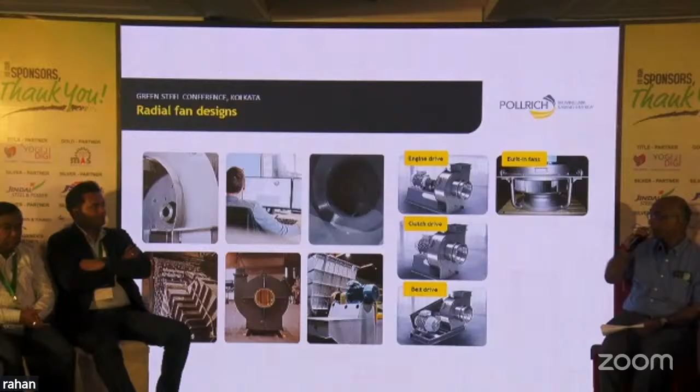Thank you, sir. It was actually 15 minutes, and you finished below the time, so thank you. We should thank him. Thank you. I would take the liberty of 5 minutes.

May I ask you a question? Yes, please. So these fans you are using in sinter plant and pellet plants, as you have shown, you are talking about the wear resistance steels that will be used in the fans. Right, so these plants are all very abrasive, dusts will be available. And what about the casings? What about the fans?

What kind of life are you predicting now, as of now? And what are the maintenance practices you are going to adopt to bring out a greater life in these fans? Okay, you will be giving a balanced fan, but what is the life? Life cycle. Very valid questions. See, what happens is the life of a fan depends on the dust characteristics predominantly, and how we operate and maintain the fan.

For example, let's go one by one. The bearing housings, coupling - we need to have periodic maintenance and checking. So when we do that, we can do preventive maintenance, and then we can increase the life of those components. When it comes to the impeller, we use, depending on the chemistry of the dust, abrasiveness, and the particle size distribution, we select the right material and the layover of that. So we do the hard facing.